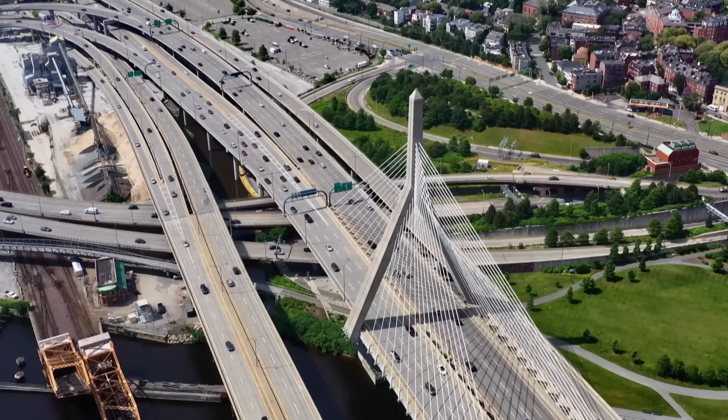In Boston, a deadly flaw brings traffic to a screeching halt. That epoxy gave out and the concrete fell down. A river crossing collapses in Wales, devastating the local community. So I picked the phone up. She said, the bridge has come down.

Well, it's just unbelievable. In Milwaukee, a bridge begins crumbling in broad daylight. The fear was that the entire structure might come tumbling down. And a dam collapse in Spain changes the course of history for one town.

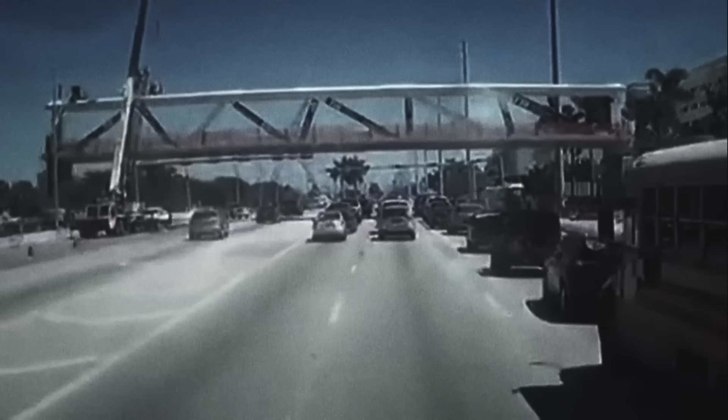With big builds, even the smallest mistake can be a huge disaster. From miscalculations to misunderstandings, some with deadly consequences. These catastrophes are every engineer's worst nightmare.

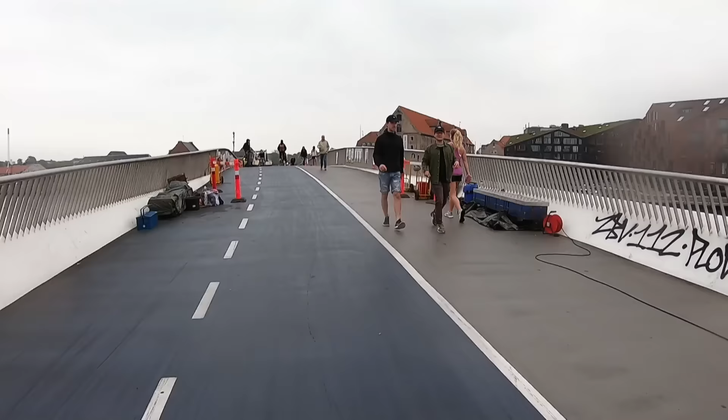When engineers go big, every last detail must be checked and double-checked. Because the most innovative builds can be undone by the smallest oversight. Like this interstate tragedy in the capital of Massachusetts.

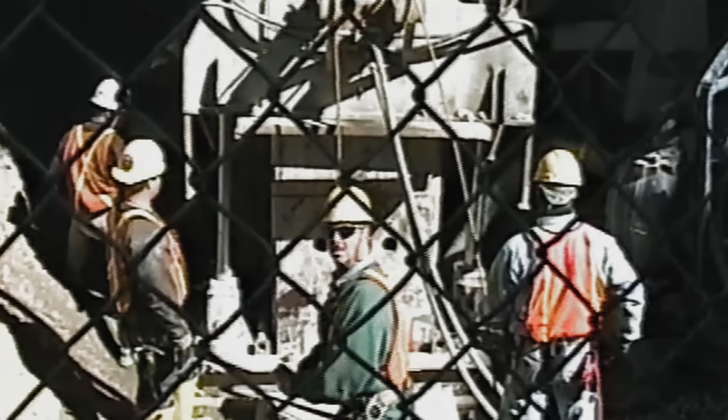This was a structural project on a supersized scale. A massive infrastructure upgrade to a city's road network. At its peak, the project was employing upwards of 5,000 people. A disaster that revealed a weakness hidden within the system. There was a lot of talk about whether this was a safe project.

Boston, Massachusetts, was founded nearly 400 years ago beside the Charles River and has grown to become one of America's most visionary cities. Tim Logan is a local journalist. Boston is one of the oldest and most historical cities in the United States. The beginning of the Revolutionary War was here, and it's always been an innovative city. It prides itself on that.

Boston is home to the Red Sox, the Revolution, and radical thinking. So when it comes to testing boundaries, this city doesn't hold back. However, in terms of urban infrastructure, Boston was stuck in the past. With a street plan devised in the days of horse and cart, for decades, Boston was one of the most congested cities in America. This was a clear obstacle to progress, as transportation reporter Tom Palmer explains.

A lot of the streets and paths in Boston that are still here today were basically formed by cows walking around, and they're narrow. After World War II, Boston, like many American cities, was a crumbling city. People didn't want to come here, nothing was being built.

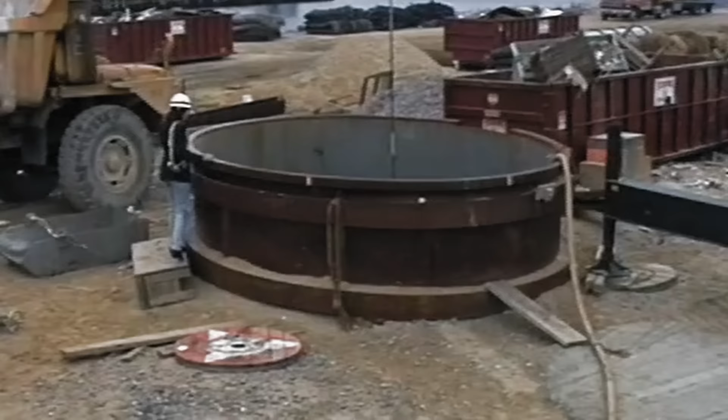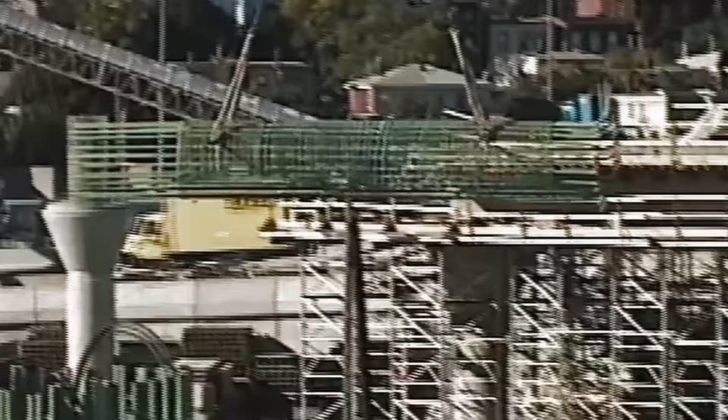In 1991, work began on an engineering project that aimed to catapult Boston's transportation infrastructure into the future. It was called the Big Dig. To open up the city and reconnect communities, the bold decision was taken to go under the very heart of downtown. In the early 90s, a construction project began, the Big Dig, to replace the old elevated central artery and to put it underground, right in the middle of the city.

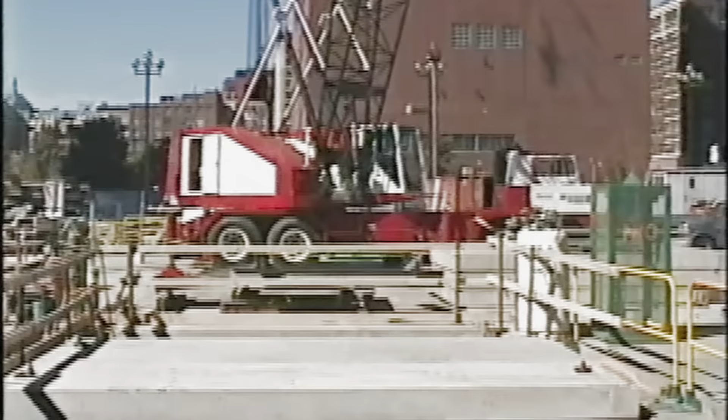The project would reroute the section of I-93 that runs through the heart of the city. It would include a new tunnel and a new bridge, complete with additional green spaces in the center of Boston. This was one of the most ambitious engineering projects ever undertaken. 6 huge sections of highway, tunnels running 1.5 miles or 2.5 kilometers right under the heart of downtown, and on top of that, the widest cable-stayed bridge in the world.

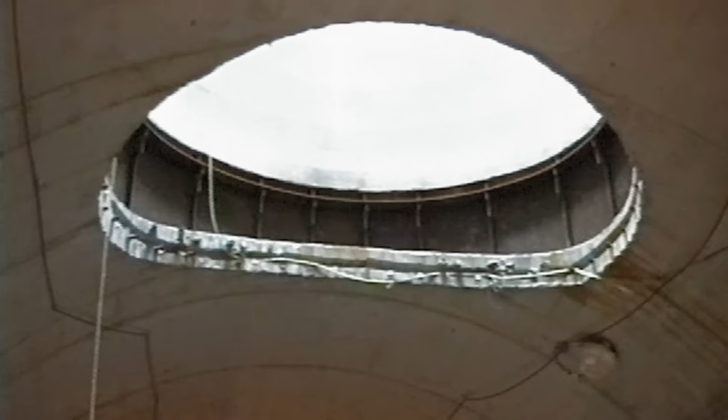The idea was to get the cars out of sight, out of mind, and to put something really good on the surface, and that's the park. They were going to turn a once desolate space into a beautiful park and reconnect the city with the river and the people with each other.

The scale of the dig was enormous, and it wasn't going to be easy. The biggest challenge for engineers was that throughout the entire construction, they had to keep the city moving, however slowly. So the tunnels needed to be built under the city while the old elevated freeway remained open. Engineer David Beck worked on the project. It was always a high priority to keep the existing traffic flowing as smoothly as possible while maintaining progress on the construction.

And if that wasn't enough, it all had to be done in unstable conditions because most of Boston was built on reclaimed land dating back over 200 years. Digging on a scale like this, directly underneath a bustling city and through precarious reclaimed land, presented engineers with a huge challenge. And the city with a hefty price tag.

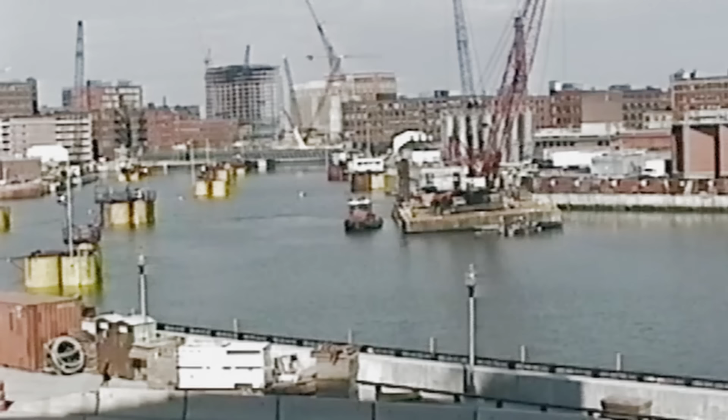This was the most expensive highway project in US history. It went 14 years and more than $12 billion over budget. But an ever-increasing schedule and spiraling costs weren't the only issues with this project. In 2006, after all of the main bridges and thoroughfares had been opened to the public, tragedy struck.

There was a 3-ton piece of concrete used for ventilation that fell and killed a lady, unfortunately. A project that had initially brought hope to the city sent a shockwave through Boston. There was a lot of fear about driving in any of the tunnels. There was a lot of talk about whether this was a safe project, whether it had been done safely. After the collapse, there were real concerns about the overall safety of the entire project.

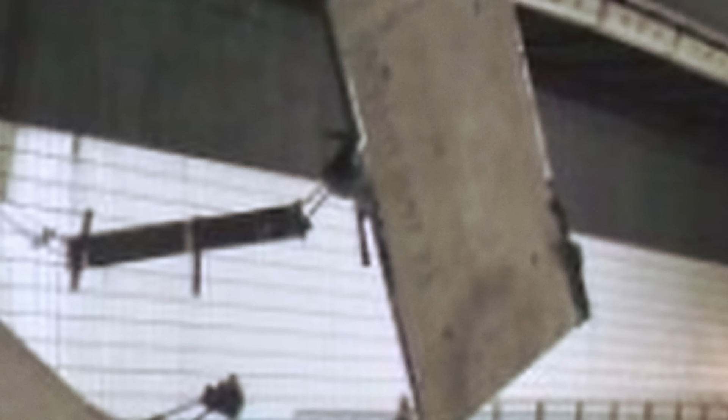In the wake of the disaster, a federal investigation was launched to uncover what had caused the collapse. The answer lay in a material used in the construction called epoxy. Epoxy is a structural adhesive which is widely used in the construction of everything from aircraft to automobiles, anything where a high-strength bond is needed.

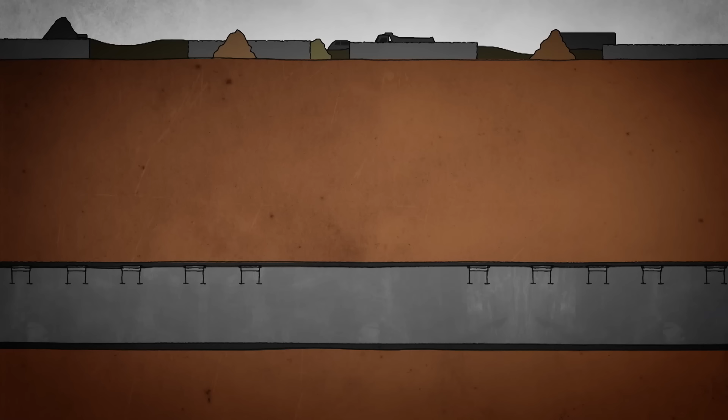The tunnel design included an overhead ventilation system suspended from the ceiling, but one 90-meter section of the tunnel lacked the necessary support structure, so a retrofit solution was needed. Holes were drilled overhead and long anchor bolts inserted, secured with epoxy for extra strength. The investigation concluded it had something to do with the epoxy that those heavy panels were hung in and the bolts that went into them.

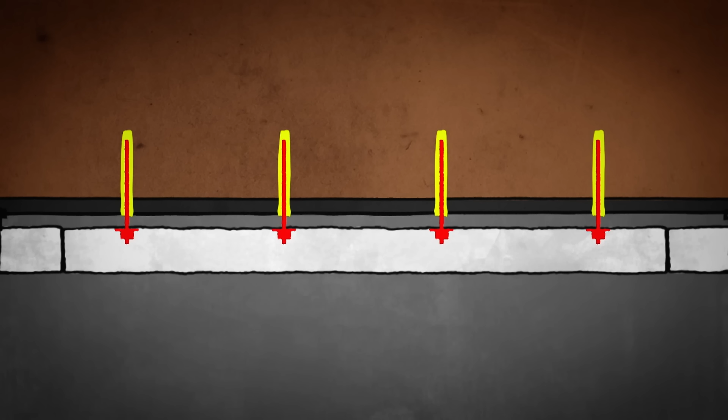The concrete roof had been poured before they designed the ventilation system. And in that area of 300 feet, they had to go ahead and drill in inserts, and they used epoxy grouted inserts into it rather than mechanical sections. And over time, that epoxy gave out and the concrete fell down.

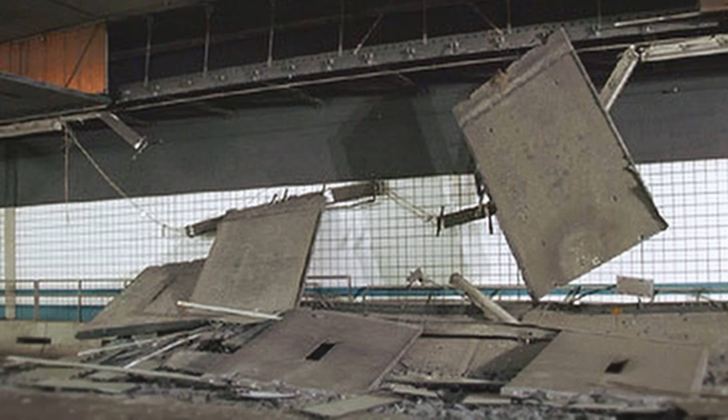The investigation also revealed that the epoxy-secured anchor bolts used in this section were incorrectly installed. Not only that, but this retrofitted solution was an inadequate choice for the ventilation system that weighed hundreds of tons. Concrete expert Gary J. Klein was part of the investigation. We're going to test the pullout strength of an anchor that's of the same size as the anchors that were used in the connector tunnels for the Big Dig and is embedded the same distance into the concrete.

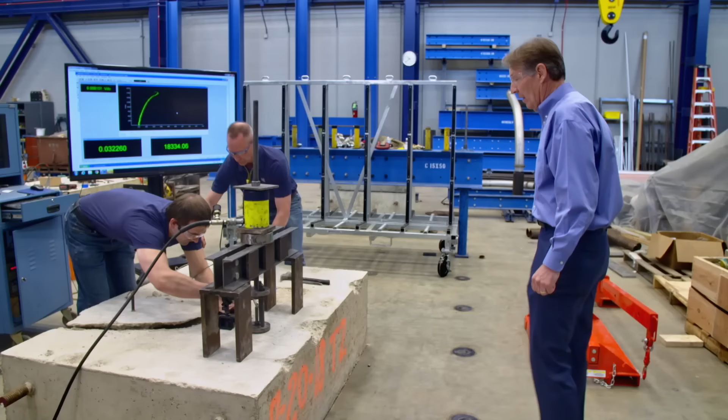This test shows the load-bearing capacity of anchor bolts that have been properly installed. The concrete has been drilled and cleaned, and the epoxy correctly applied. This pump is pumping the hydraulic ram, which is extending this larger rod, which pulls out, if you will, the smaller rod that's embedded into the concrete. The concrete failed, as expected, in what we call a breakout failure.

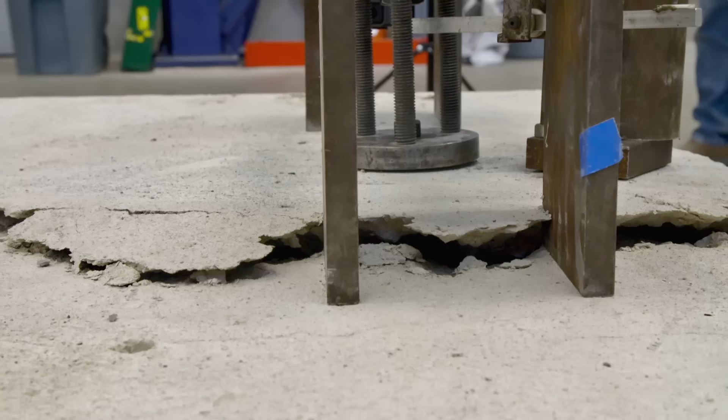So the epoxy held, but the concrete itself was only so strong, and we got a breakout failure. In this instance, the concrete itself failed before the epoxy anchor bolt joint. In this second test, the anchor bolts have been installed incorrectly, similar to what happened during the Big Dig. The results are clearly different. So these test results are quite different compared to the first test.

And the first thing you'll notice is that the epoxy is failing. The rod is literally pulling out of the concrete without damaging the concrete itself. In the first test, where the epoxy was properly installed, it was strong enough to force the concrete to break out. In this case, it's nowhere near strong enough. The correctly installed anchor bolts are more than 4 times as strong as those installed incorrectly.

The failure mode was the same type of failure that occurred at the Big Dig. It slowly pulled out without having enough strength to cause a breakout failure of the concrete or a failure of the rod itself. But what could engineers do to solve this problem and salvage the entire Big Dig project for the city of Boston?

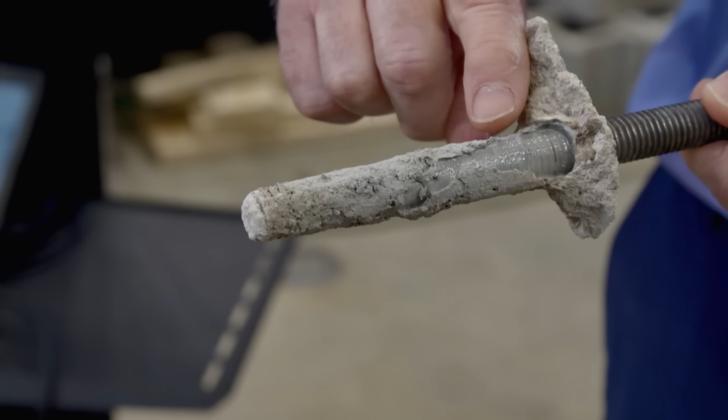After the deadly tunnel collapse of 2006, all of the incorrectly installed anchor bolts used in the ventilation system were closely examined. 242 were highlighted as potentially dangerous. As a fix, a new type of anchor bolt was proposed. Concrete expert Gary Klein explains.

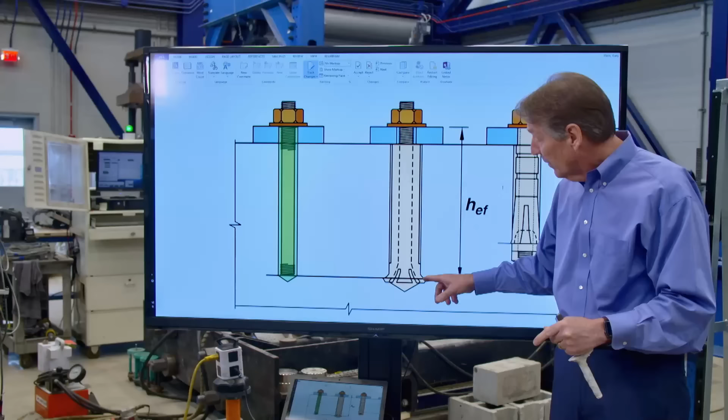They insert this entire assembly into the hole, but then there's a second step in which they rotate the outer portion of the assembly such that these flanges are forced to spread out around the bottom, such that these flanges give direct mechanical attachment, if you will, between the anchor and the concrete. They should provide excellent performance for the lifetime of these tunnels. You would not expect to see any kind of pull-out over time.

All the anchor bolts had to be replaced with these new, stronger, expanding versions. After the upgrades, Boston's tunnel ventilation was deemed safe again for commuters. Despite its problems, the escalating costs, and the massive overruns, the Big Dig definitely worked. The Big Dig was an engineering marvel in many ways.

Most people recognize that Boston would not be the booming city it is today if it didn't have this highway put out of sight, out of mind underground, and a really nice park on the surface. Running the freeway underground has given the city and its people a chance to reconnect. While this project at times nearly fell apart, it ended up putting the city of Boston back together again.

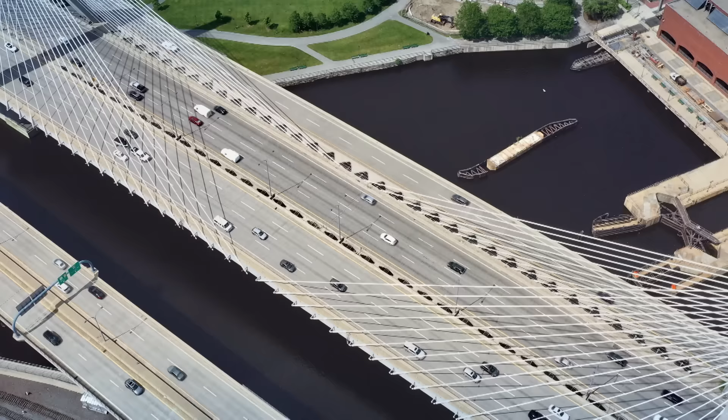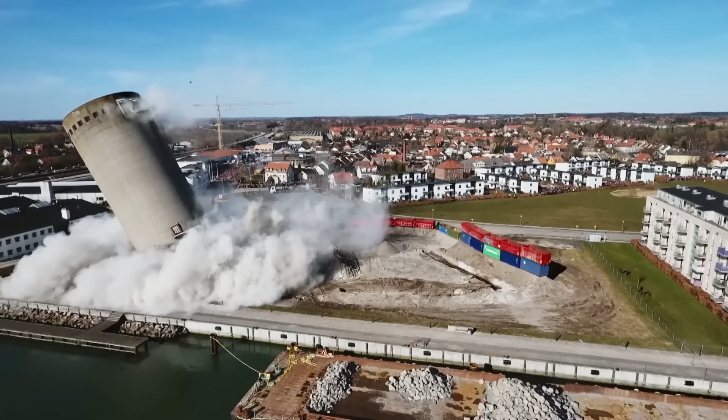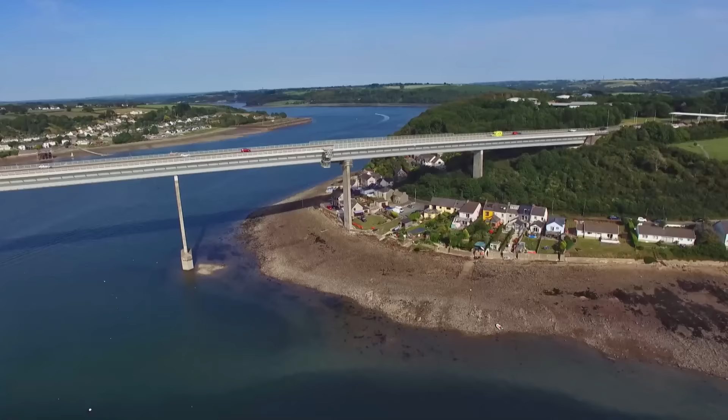The whole bridge lying at a 45-degree angle straight across the road. Well, it's just unbelievable, you know. And a deadly disaster that forced an immediate change in the way bridges were built. Lessons were learned so that hopefully this type of disaster will never happen again.

In southwest Wales lies the quiet port town of Pembroke Dock. Soaring above the town is the imposing Cleddau Bridge. It spans more than 800 meters and connects this peninsula to the rest of the country. But it wasn't always so easy to cross this divide, as retired police officer Phil Lloyd explains. We couldn't have a better place to live. You've got this glorious waterway which stretches 10 miles down to the open sea and 10 miles further up to the county town.

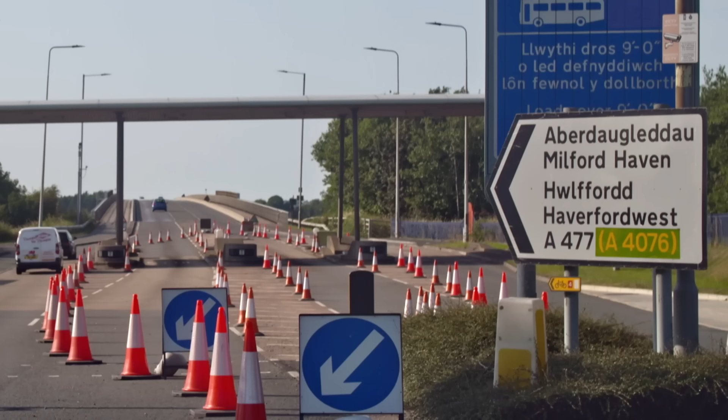There's only 2 ways to cross the river in the years gone by. You either went by ferry boat, and if you missed the ferry boat, then you had a 28-mile trip right around the main road. Once a vital Royal Navy dockyard, in the 1960s the military shipped out, and the townsfolk had to look across the water for work. The ferry could only carry 24 vehicles and around 250 pedestrians per crossing.

The construction of a large oil refinery in Milford Haven in the 1960s on the north side of the estuary meant a more practical solution was needed to connect these parts of the country. So back in the late part of the 60s, it was proposed that a high-level bridge should be built. It was a godsend, really, for the majority of people because, you know, you never had to take this long journey again or go on the ferry boat, especially in rough weather.

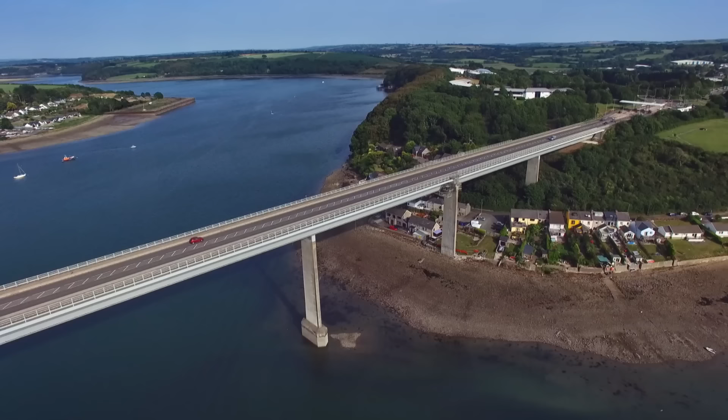Construction of the Cleddau Bridge began in 1969 and was due for completion in 1971, taking a very direct route. On the southern end, the bridge would cut right through the heart of the village, going between houses and across gardens. Construction took place simultaneously on both sides of the river and was made up of 7 spans built in self-contained sections that would then be moved or trundled along the partially completed bridge and lowered into place in what's known as a box girder design. This is a tried and tested technique that's both time and cost efficient, as engineer Brendan Walker explains.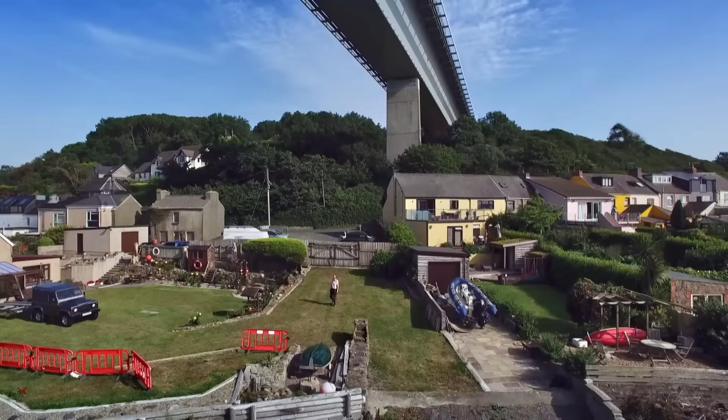On a warm summer's day in 1970, local residents were going about their business as the Cleddau Bridge was being constructed directly above their heads. Former police officer Phil Lloyd was on his way to work. On Tuesday, June the 2nd, 1970, it was extremely hot, one of the hottest days we'd had for years. I went into work into Pembroke Dock, which is just over the hill there. And I went into work at 2 o'clock.

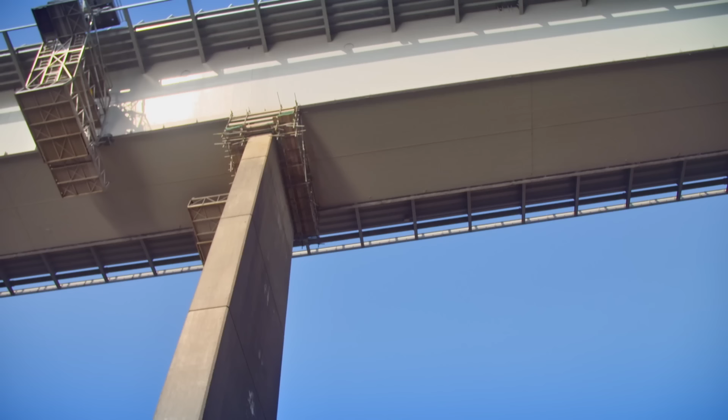And I'd only been in work about 20 minutes when the switchboard operator said, "Your mother-in-law's on the phone." So I picked the phone up. She said, "The bridge has come down." Now, mother-in-laws do tend to exaggerate a bit, and I thought that's what she was doing. But Phil's mother-in-law was stating the facts. At 2:16 p.m., as the 75-metre second section of the southern end was being lifted into place, disaster struck. The entire span buckled and came crashing down through the middle of town.

Phil Lloyd was first on the scene. So myself and my sergeant, Bryn Phillips, we jumped in the van and we came down this road. It comes all the way down here, which leads into the village. And if you can imagine, you come here to find that structure at a 45-degree angle going across the road, which, well, it's just unbelievable, you know. And of course, everybody is out of their houses wondering what is going on.

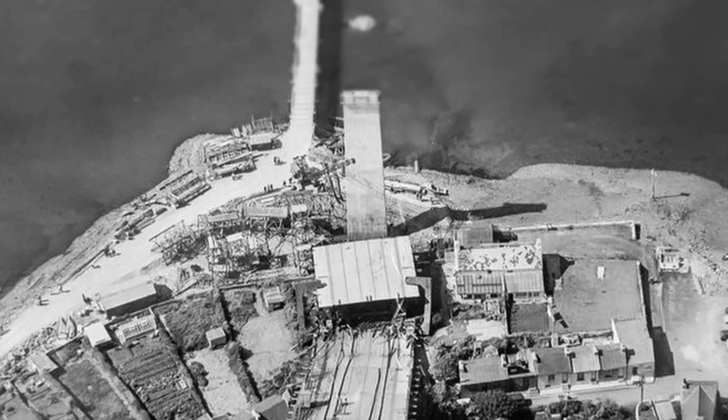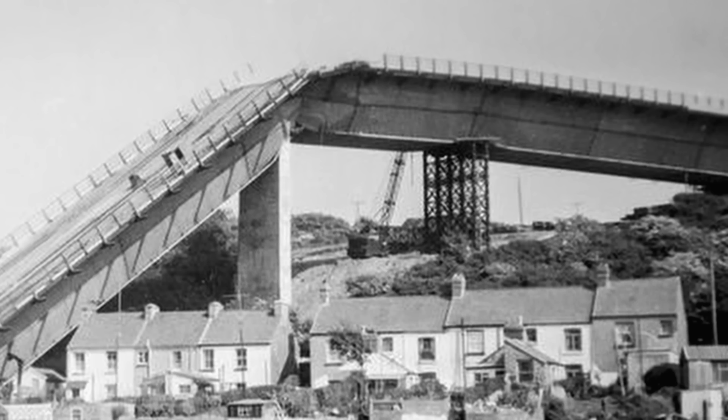Despite tons of steel and concrete falling more than 30 metres onto the town, amazingly, it missed both houses and residents. But those working on the bridge weren't so lucky. 5 construction workers were injured, and tragically 4 lost their lives in the disaster. It was only the fact that they had been careful to avoid building directly over the top of houses that prevented this disaster from being a whole lot worse.

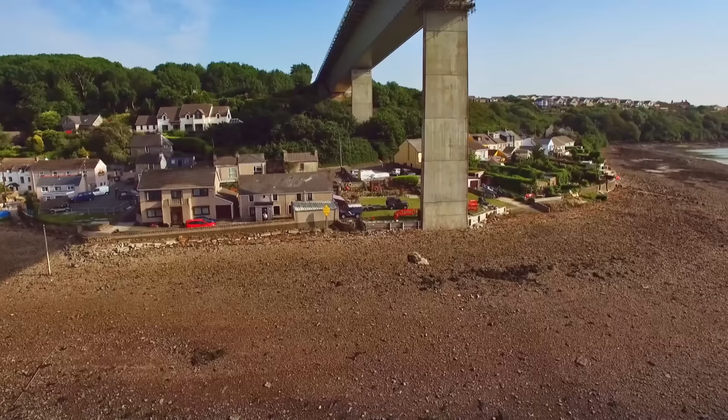People wanted to know, you know, what had happened, why had it happened. The construction site was immediately shut down and questions were already being asked. How had a seemingly simple box girder failed so catastrophically? An investigation into the Cleddau Bridge collapse was immediately launched, and it appeared that the fault came down to a miscalculation made on the drawing board. As bridge engineer Kevin Lowther explains.

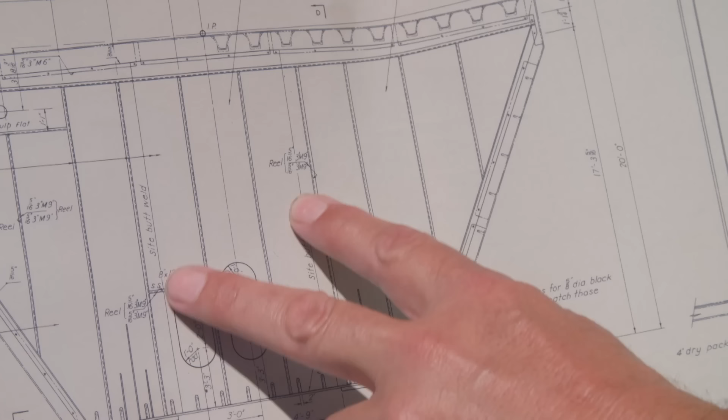Here we've got the original design drawings for the bridge, and we can see here on the drawing that it shows a 3/8 thickness of plate, which should have been 3/4, which would have made all the difference. It might not sound like a lot, but this was crucial to the integrity of the entire structure. It's a big, big difference from that to that, twice the thickness. And as an engineer, you look at something which is 3/8 of an inch thick and think that isn't very strong, not particularly when it's got to support all of the load that it's got.

Although the difference in width for a structure of this size might seem tiny, we're only talking about 3/8 of an inch or 9 millimeters. It actually made all the difference, and the consequences, as we now know, were catastrophic. Here we are. This is where the buckling of the bridge happened. Here's the diaphragm, and we can see here that it's 19 mil or 3/4 of an inch thick. This is what the original design asked for. This seemingly tiny error meant the structure didn't have enough strength to support itself before it was fixed in place, and the whole thing came crashing down.

As the 75-meter span was lowered into place above the town, the diaphragm that was meant to keep it stable simply didn't have the strength to handle the load, causing the support to buckle and collapse. The further the span stretches out unsupported, the more strength it needs, and this proved to be the fatal flaw in its design. You know, this tremendous construction, I think it's 5,000 tons altogether going across there. And eventually they found, of course, that where it bent over Pier 6, there was insufficient strengthening.

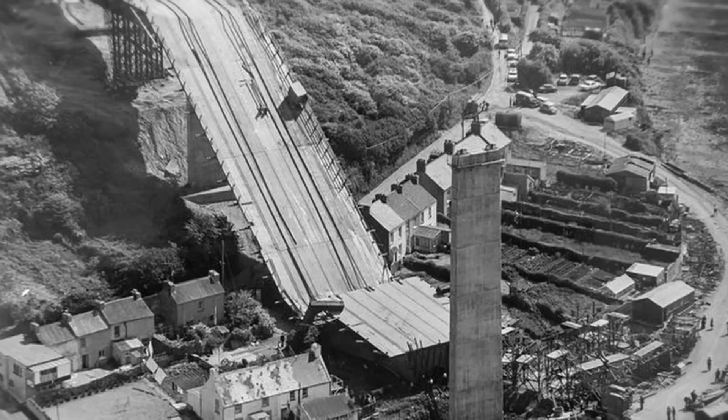One final piece across the river, it was sticking out, it was cantilevered from this final pier. The weight of the bridge wanted to pull this end of the bridge down. And if this support isn't strong enough, this is exactly what happened. The whole thing bent around this pier point here, with the diaphragm inside failing catastrophically.

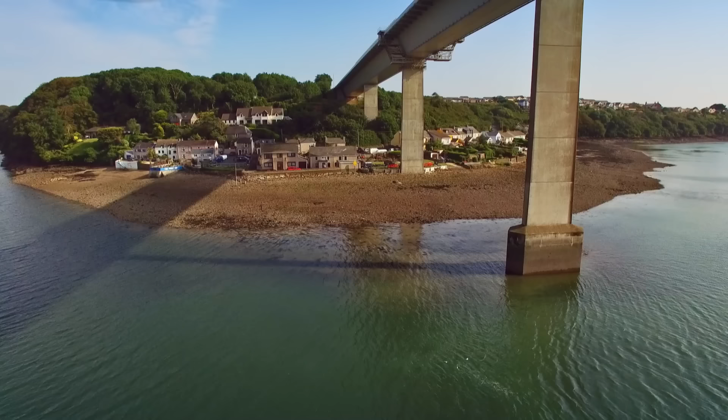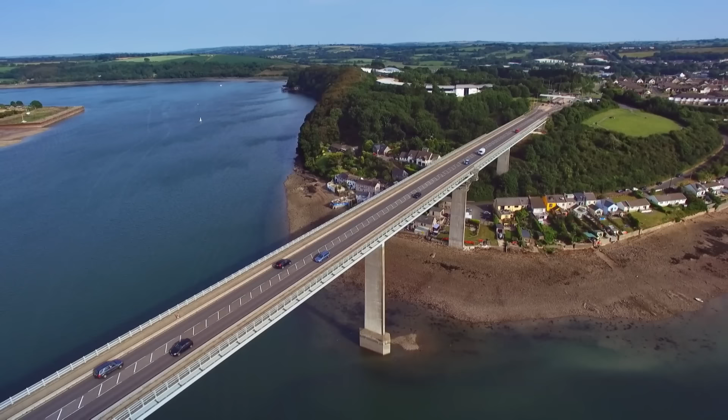In 1972, after the 2-year investigation was completed, work restarted, with the Cleddau Bridge finally opening on March the 20th, 1975. In its first year, nearly 900,000 vehicles used the bridge, and today around 4 million cross it every year. The old ferry would need to make 400 crossings a day just to keep up. As a result of the disaster, new regulations were established for both the design and construction of all box girder bridges in the UK. If there is a silver lining as a result of this disaster, new and much more rigid standards were brought in. So hopefully a tragedy like the Cleddau will never be repeated.

Nearly 50 years later, the Cleddau Bridge catastrophe remains the last major bridge disaster in the United Kingdom. This bridge was a much-needed and vital connection to bring these two parts of the country together. This time, it looks like engineers have got it right. Thankfully, for the last 49 years, it's been as safe as houses.

With big engineering, disaster can strike while the paint is wet and the welds are still warm. But sometimes problems can lie hidden until Mother Nature intervenes. Like this iconic crossing in Wisconsin. This structure came dangerously close to a catastrophic failure. The flaw in this bridge almost caused a tragedy. The bridge was clearly cracking and buckling. The fear was that the entire structure might come tumbling down.

The city of Milwaukee takes its name from an indigenous American word meaning good, beautiful, and pleasant land. Structural engineering professor Chris Foley is a local. One of the great things about Milwaukee is that we have all 4 seasons. We have spring, summer, fall, and winter. Falls are fantastic, beautiful leaves. We have great resources like Lake Michigan.

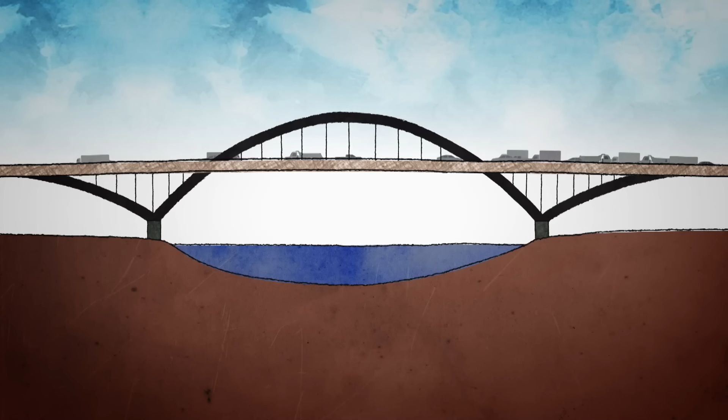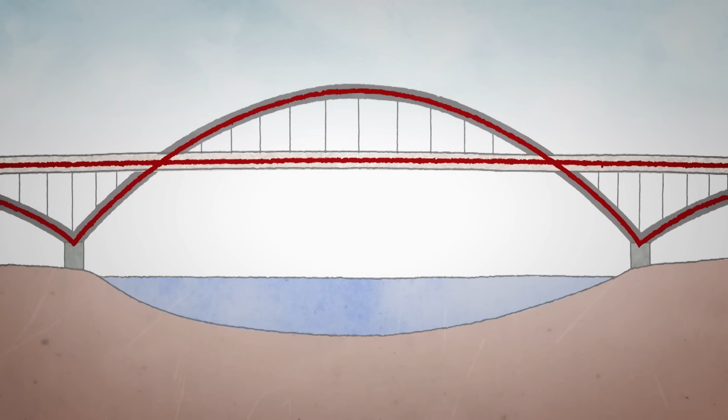In a tied arch bridge, the arch supports the deck, and the deck stops the arch from pushing outward. The arch and deck balance each other, which reduces the need for supporting abutments, making these bridges easier to build. Engineering professor Farhad Ansari explains the advantages of this design. So imagine this could be the same analogy like a bow and arrow, where you have a bow and your arrow is applying the force, and it actually transmits all the forces within the structure itself. It doesn't let any forces come externally.

So by having a tied arch, we are increasing the force carrying capacity. We don't need a large abutment. We can prefabricate the arch and bring it by barges and just basically put it in place. The Hoan Bridge carried traffic safely for decades, until a hidden engineering flaw came to light in a big way.

On December the 13th, 2000, a commuter using the Hoan Bridge witnessed something alarming. A motorist who was driving over the northbound section noticed that something wasn't quite right and called 911. Drivers noticed that an important segment of the bridge unexpectedly started sagging, and pieces of debris and chunks of concrete and so forth from the bridge fell on Jones Island, and the fear was that the entire structure had been compromised and might come tumbling down. The bridge was clearly cracking and buckling, and the bridge deck was sagging down by around 4 feet, or over a meter.

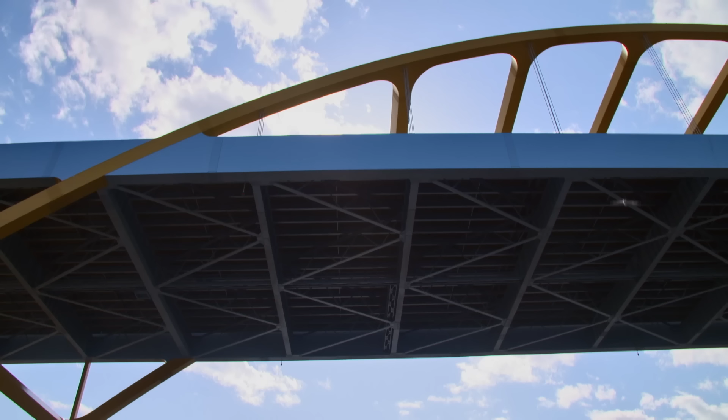This happened in the morning during the rush time. No one was hurt, but the bridge was immediately shut down due to safety concerns, obviously, and the bridge remained closed for quite a bit of time so they could inspect the bridge and find out what the reason for the collapse was. It's kind of fortuitous that the portion that failed did so in a relatively limited way, and they caught it in time, because if they hadn't, many of us who travel the bridge frequently can only imagine the kind of catastrophe that would have caused if any or all of this bridge had failed.

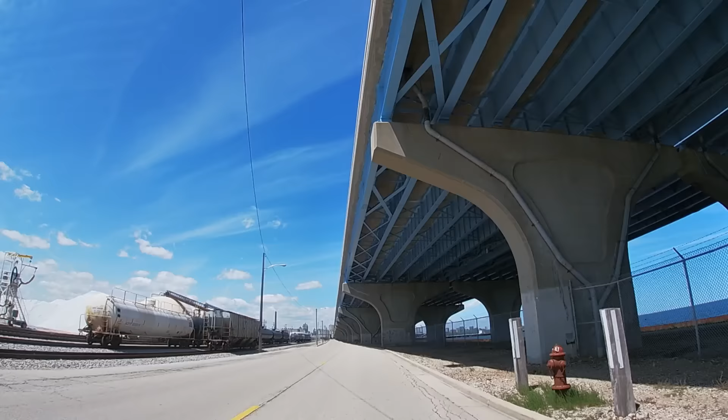Over the years, the bridge was forced to carry heavier loads. The past decade's traffic has increased greatly. There's no doubt that over time, growing traffic had an impact on Hoan Bridge. For me, this is the responsibility of engineers to predict and take into account. The investigation revealed the problem was not the increased load, but something that lay in the bridge's support beam structure. 2 of the 3 steel girders supporting one section of the southern approach span exhibited a series of full-depth fractures.

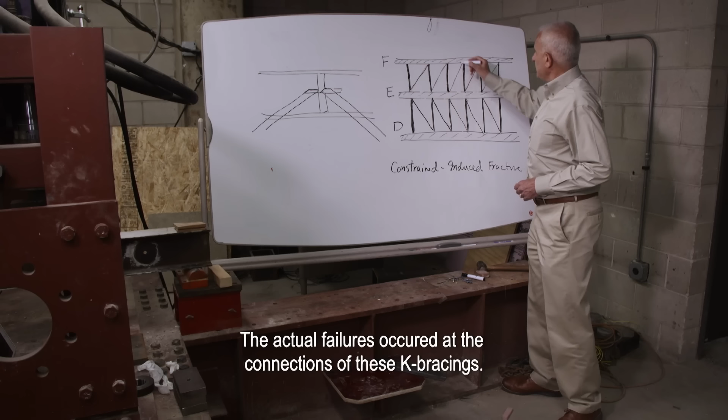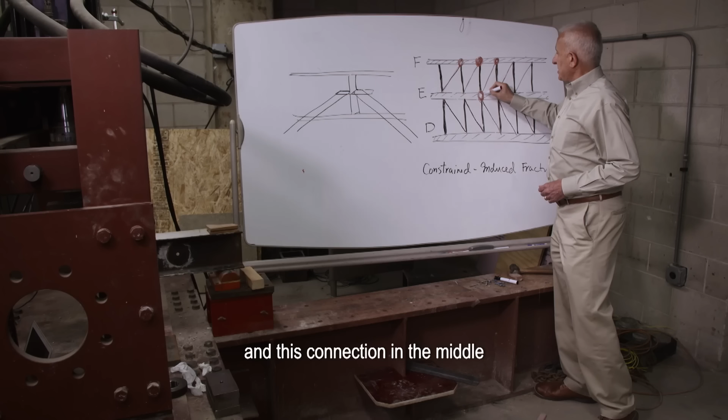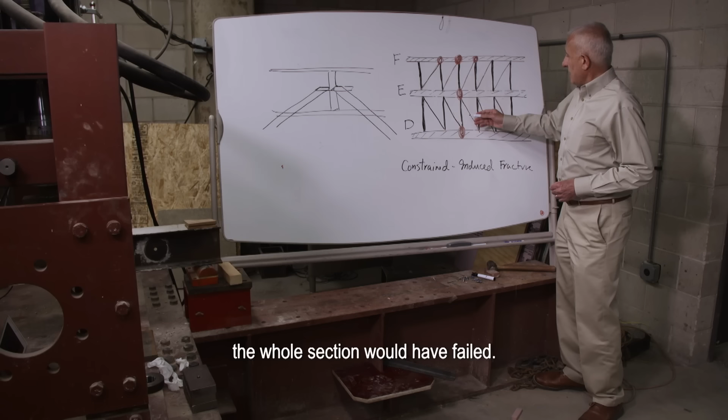The actual failures occurred at the connections of these K-bracings, where we had a through-the-depth crack in these 3 sections, another one right here, and this connection in the middle, and the last one was not as severe, and the cracks didn't go through the whole depth of the web. And actually, because we had sufficient redundancy, if this girder also at this connection had a through-the-depth crack, the whole section would have failed. However, this redundancy helped the structure. The structure failed, but it didn't collapse.

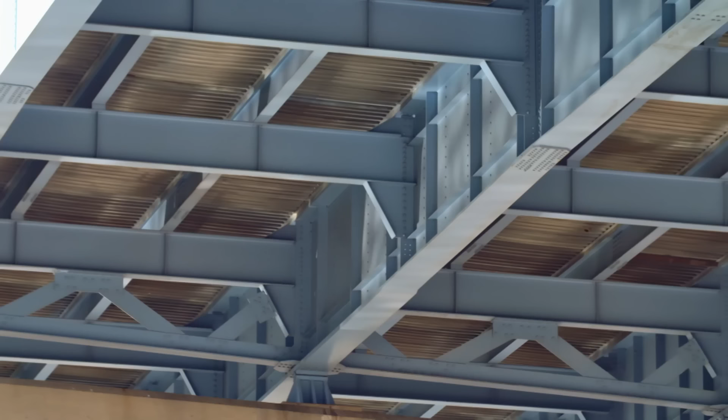Analysis of the cracked steel under an electron microscope identified the failure as a brittle fracture. Brittle fracture is often caused by low temperatures. If the steel temperature is at or below its ductile to brittle transition temperature, then it will be susceptible to brittle fracture. The ductile to brittle transition temperature is the point at which the strength of a material is significantly altered and often compromised by the surrounding air temperature.

For steel, this occurs around 0 degrees centigrade, so when the temperature falls below freezing, which is common in Milwaukee's winter, steel can become brittle. There's no doubt that stresses from extreme weather contributed to the failure. But while Mother Nature played a part, it wasn't the only factor.

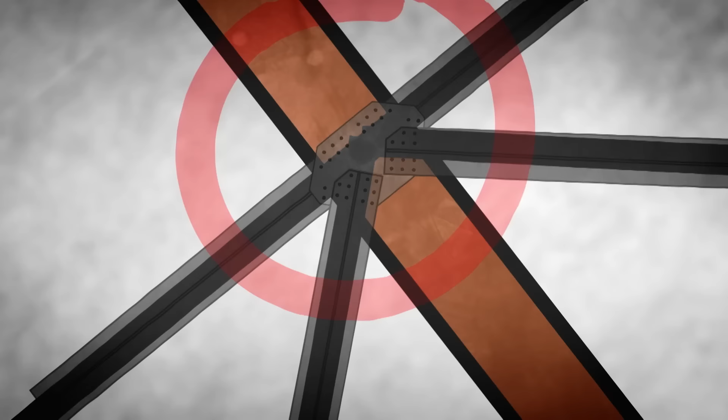On closer inspection, engineers noticed the cracking had originated from the joints of the bridge's lateral bracing. These connections were deemed too close together and too rigid, leading to a reduction in the bridge's overall fracture resistance. Elements of the bridge that had been installed to give it strength had actually made it weaker.

Reopening the crossing would take some major engineering. The fix was that they demolished, through controlled demolition, several segments of the bridge, brought it down and rebuilt them with a less constraining cross-bracing detail that we see in the bridge on the southbound area today.

The failed section of the bridge had to be completely removed, and a thorough inspection of the remaining parts was conducted. They did find that they didn't need as much bracing as was put in the original details, so they were able to remove quite a bit of the bracing in the bridge. The Hoan Bridge is now a lot more flexible and a lot safer. Crucially, it's also better suited to the elements, but this came with a hefty price tag. The repair budget for this fail was more than $12.4 million.

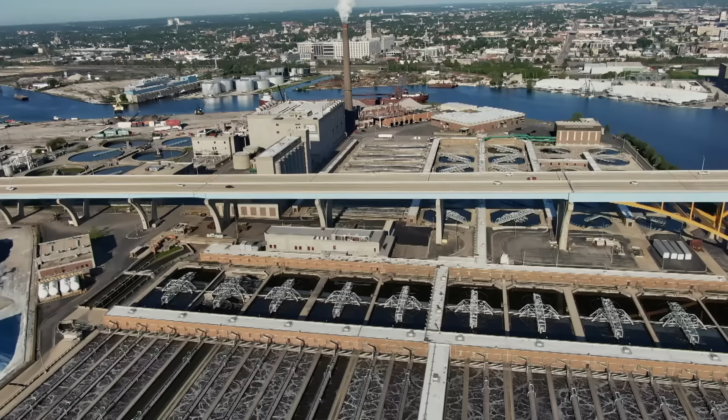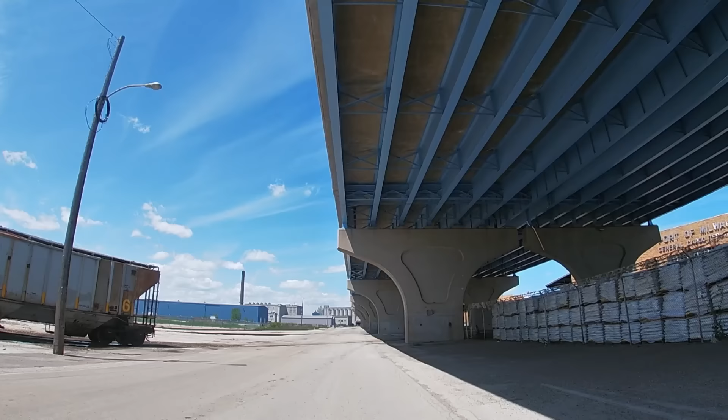Despite the high price tag, important lessons were learned. We were able to change some of the bridge codes such that we could introduce details, especially for the cross bracing, that are not constraining and can work better in this sort of an environment with a steel bridge, so that we don't have this sort of brittle failure with the cracking propagating through the bridge girder all at once.

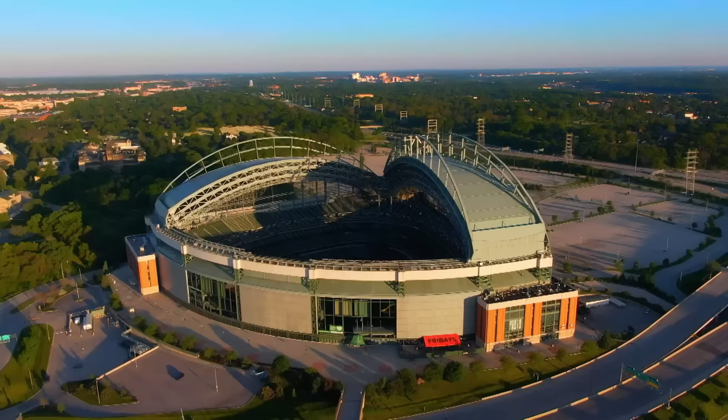Understanding failures in engineering projects could ultimately save time, money, and lives by changing design philosophies and helping engineers understand the situations when mistakes and errors can be very costly. The age-old battle between engineers and Mother Nature isn't always a fair fight. Even though a structure seems indestructible, a simple fail can have catastrophic consequences.

Like this Spanish dam that was pushed to its breaking point. This was a brutal clash between engineering and Mother Nature.

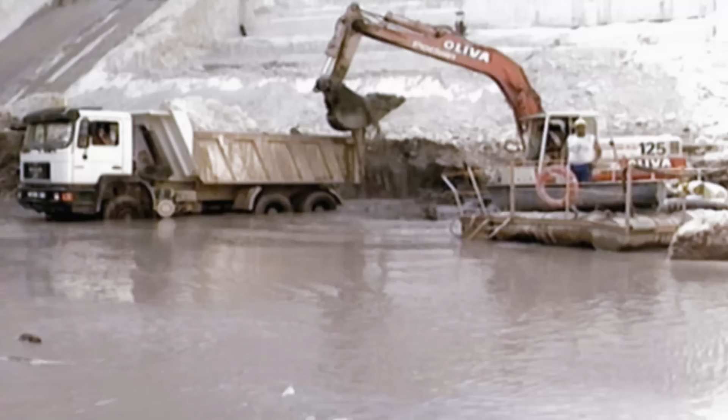An engineering disaster with a lasting legacy. The first Tous dam only managed to stand up to this region's turbulent weather for 4 years before disaster struck. The picturesque province of Valencia lies on the southeast coast of sunny Spain. Spain's Mediterranean coast is known for long, very dry periods, punctuated by brief spells of heavy or torrential rain. Local journalist Isabel Domingo knows the weather in this region well.

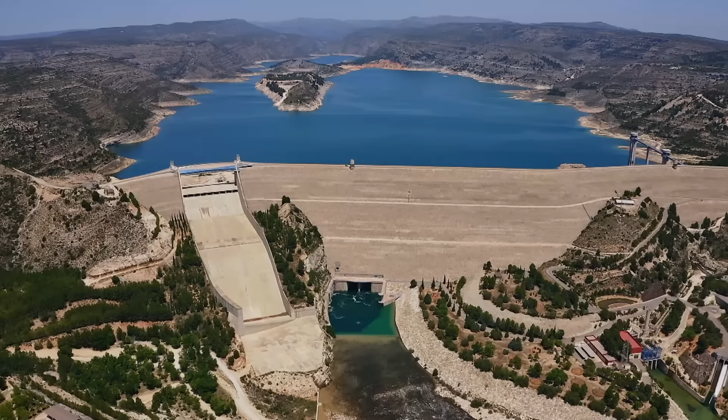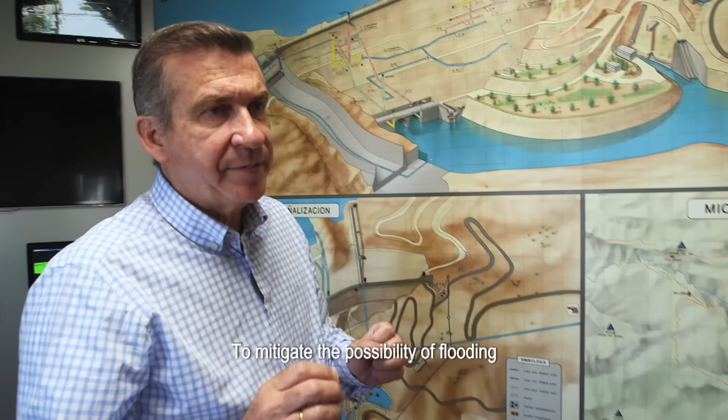The Tous Dam is an epic piece of engineering designed to protect hundreds of thousands of people from dangerous flooding brought on by torrential rains. So whatever happened behind the dam, by regulating the output, the people living downstream should stay safe. The Tous Dam is the perfect fit for Valencia's unpredictable climate.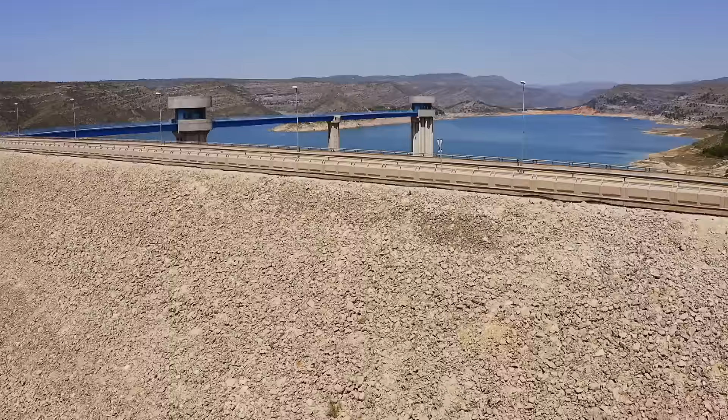But this isn't the first dam to stand here. Its predecessor, built in 1978, hid a major engineering fail that was dramatically revealed soon after construction. The first Tous Dam only managed to stand up to this region's turbulent weather for 4 years before disaster struck.

On October the 20th, 1982, a freak rainstorm hit eastern Spain. In just 24 hours, the region experienced 22 inches or almost 56 centimeters of rain around here. That's the average for an entire year. Water levels rose behind the dam and started to reach dangerous levels. When the first operator reported for work the next day, water was already approaching the crest of the dam.

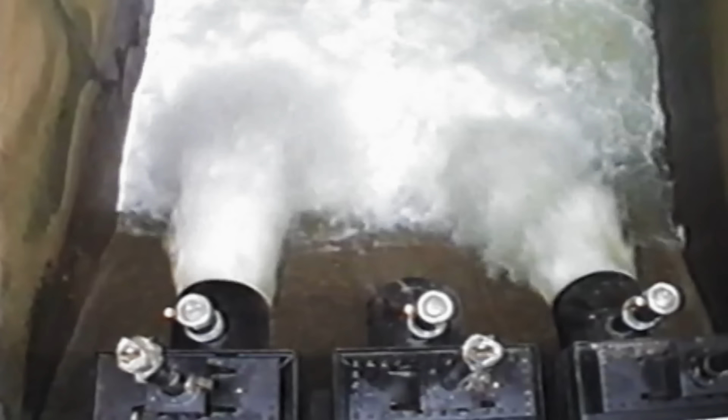Water spilling over the top of the dam, or overtopping, is one of the worst things that can happen. So nearly all dams have safety release valves called spillways. By opening gates at the top, water can be released in a controlled way. The dam operator attempted to open the spillways to lower the water level, but they were stuck in place and wouldn't budge. With the gates stuck shut, the water level continued to rise.

And by early evening, water gushed over the crest. Suddenly, the Tous Dam collapsed. A raging torrent headed downstream, leaving a path of destruction in its wake. An emergency evacuation was called for the 100,000 people living in surrounding towns.

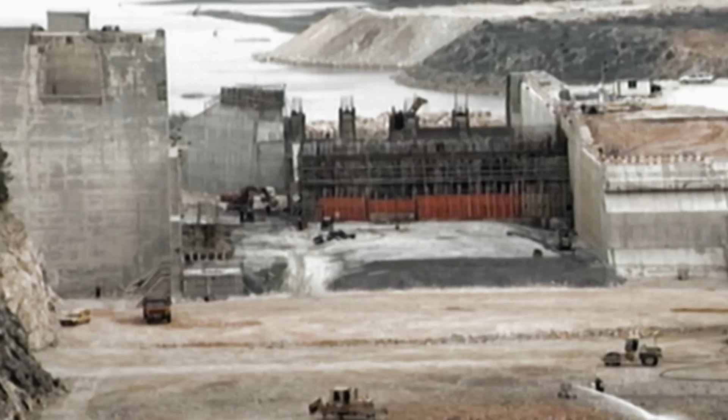Across the region, tragically, more than 20 people lost their lives. Survivors were left asking, what exactly had gone wrong? After the drastic floods, the Tous Dam lay in waste. Experts immediately began to investigate how this disaster had spiraled out of control.

One obvious flaw was in how the spillway gates were operated. The problem was that the storm knocked out the power, but the spillway gates, the emergency release valve, needed power to open. There was an emergency generator, but it was located near the base of the dam. The emergency generator had been swallowed by the flood early that morning, and by the time a replacement made it through the floods, it was too late to do any good.

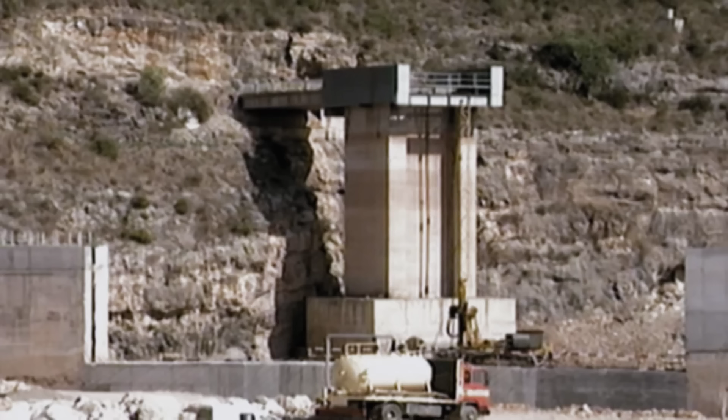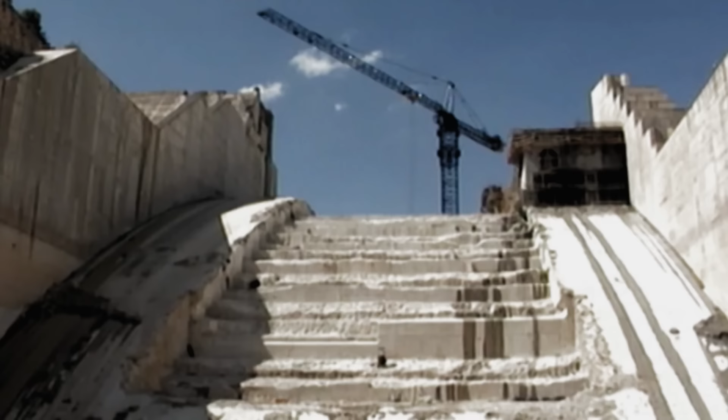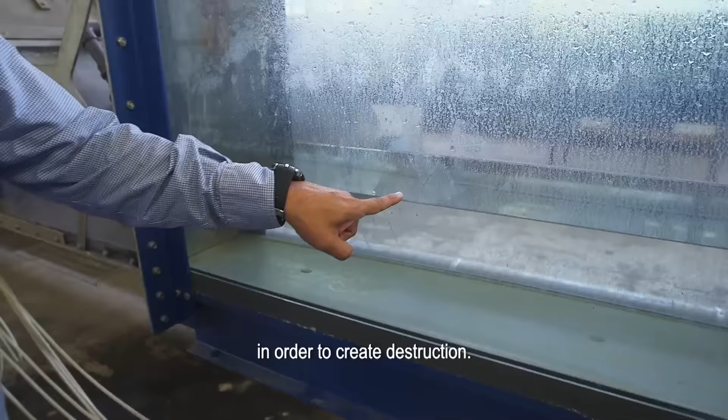Once the water breached the dam, disaster was inevitable downstream, as Professor Ignacio Escuder demonstrates. So what it's useful to see here is how the water behaves. Now we see a very calm water here, but what's going to happen here is going to help you to understand the power of water in order to create destruction. So just have a look at this.

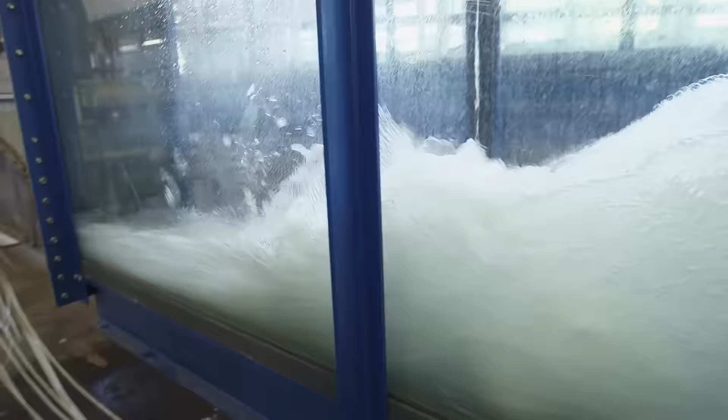Carlos, adelante. The water pressure is increased to demonstrate what happened as the dam began to overtop. Let's say we are now at the toe of the dam, and the energy has to be compensated. And it's going to be a very turbulent area, and there's going to be an increase in water level, and the energy for erosion and destruction is going to look like this.

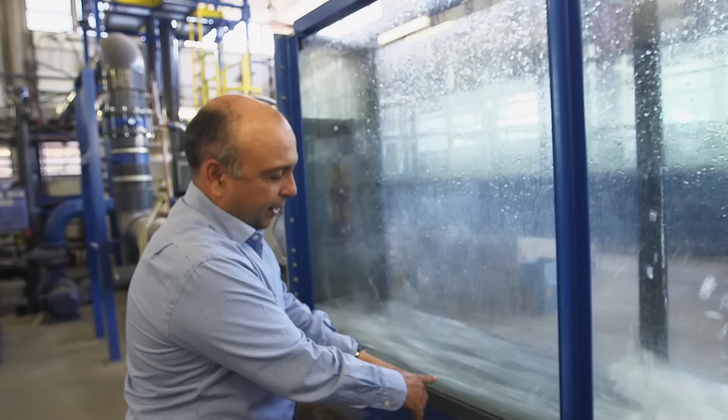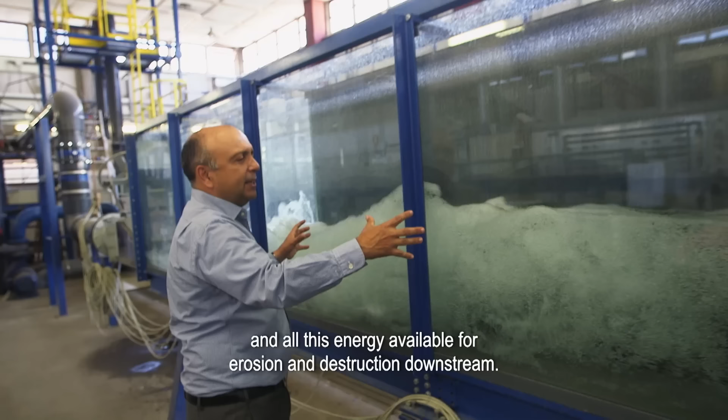Increasing the water pressure further reveals what happened downstream when the dam had failed completely. Still, we would see something like this in the river, going down the valley. Very high velocities, the need for energy dissipation, high water levels, and all this energy available for erosion and destruction downstream.

With the Tous dam well beyond repair, future flooding was a constant threat to the region. The only option was to build a new dam.

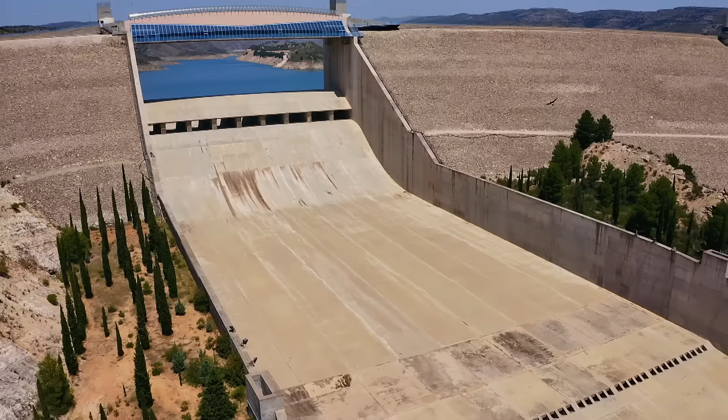The new and improved dam was finally completed in 1996, more than 10 years after the disaster. Today, the Tous dam is safer than ever, making flooding in this region a thing of the past.

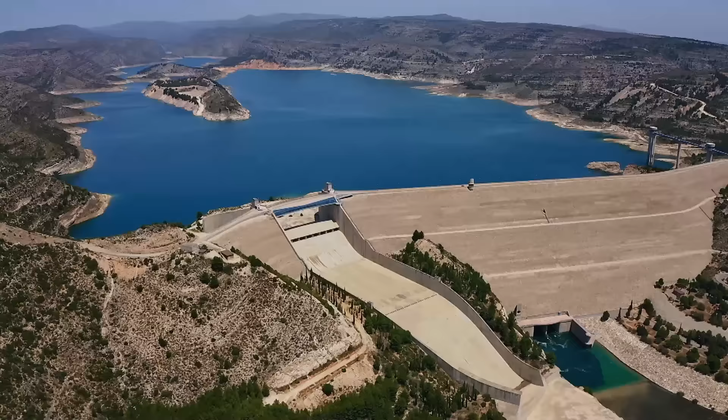Although the area is now safe from flooding, the Tous dam disaster still resonates with engineers worldwide. If there is any redemption in this disaster, it is the fact that the Tous dam failure has improved dam safety procedures and construction techniques.